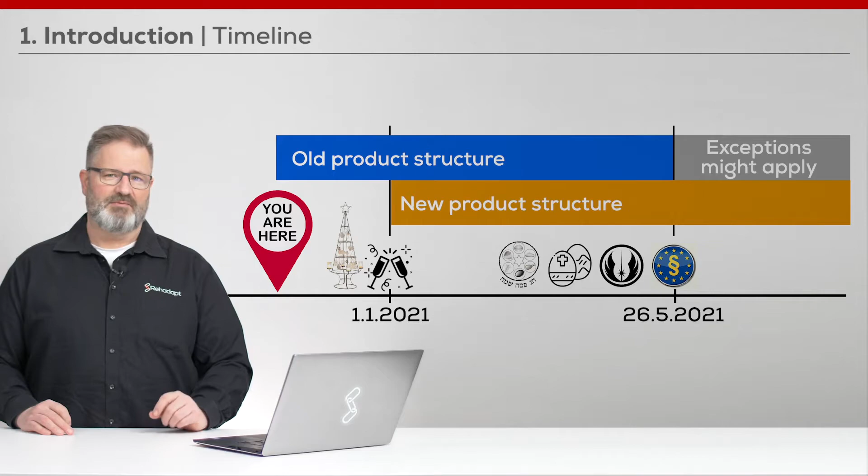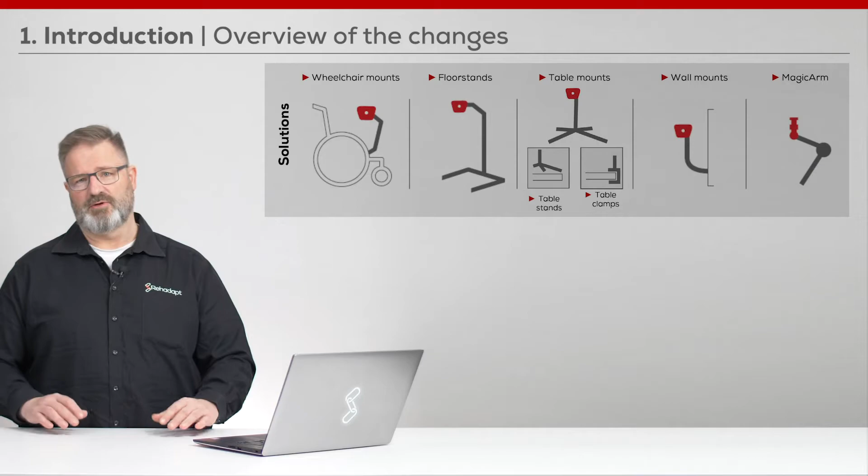Now, what is going to be changed? As you know, our product portfolio consists of wheelchair mounts, floor stands, table mounts, wall mounts, and some infrastructure around the Manfrotto Magic Arm.

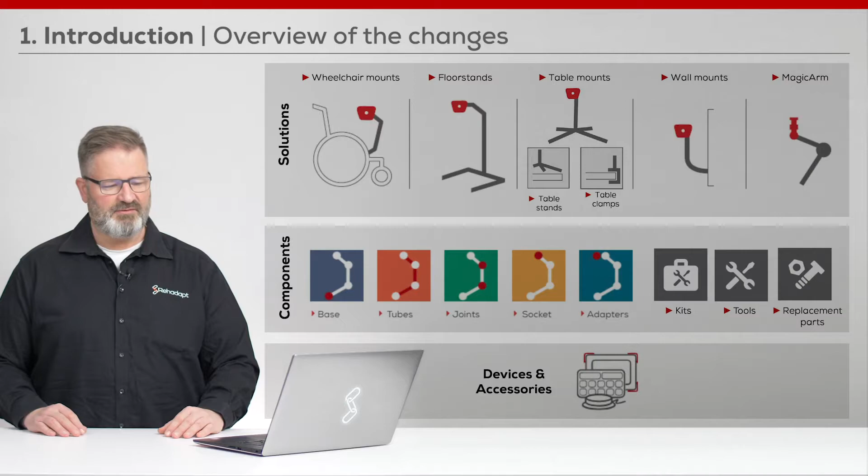Beside these full solutions, we categorize our products in families of components. In these families there are also replacement parts, tools, and complete kits. We also have some device accessories, switches, iPad covers, and so on.

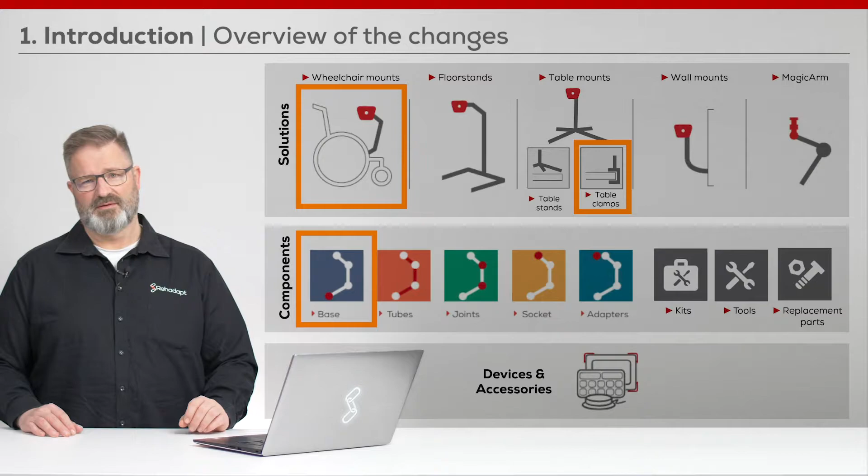Now, in this entire portfolio, the changes are being made around the wheelchair mounts, around the connecting parts where our parts meet the wheelchair, so the frame clamps and the bases, and the clamping parts of the table mounts. All the rest of our portfolio stays quite the same.

Now, particularly, you might wonder if we are keeping up the VMS service. Yes, we do. You'll still be able to hand in customer data and our team will work on a proper solution.

If you look at this process as a black box, nothing will change. You will hand over information, we will hand over a suggestion for a solution. In between, in this black box, we will handle things slightly differently.

The structure of our commercial quote will look a little different, although we're basically still using the same parts. It's declared differently to make sure that we're in line with regulatory demands.

You'll also wonder if we still keep up the effort to train you and your team and your customers. Yes, we will. In fact, we will even increase our efforts, as the standards of the medical devices are higher than before. Also the expectation of the qualification of people handling these products has increased. So we will step up with our training efforts, and you will have more offers from us to receive training on how to work with our products.

We will also continue to sell our kits, like the assessment kit, the service kit, and so on. That part will remain unchanged.

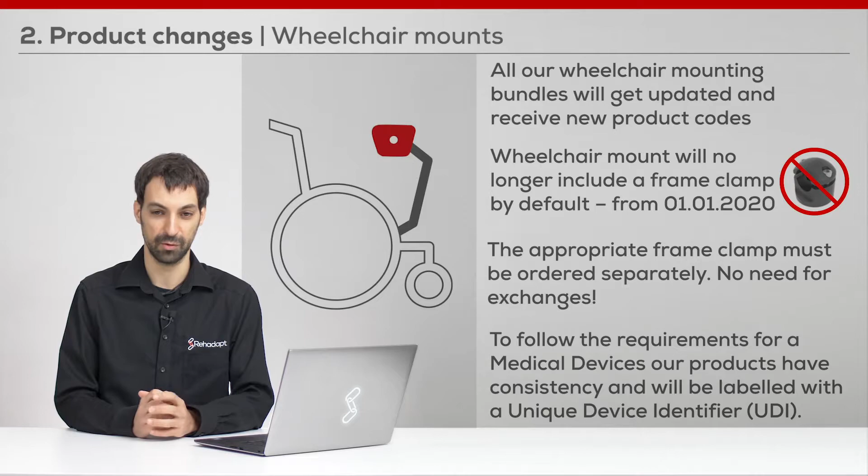We have three product lines in the wheelchair mount category. As you know, we have the M3D for heavier devices up to 6 kilos, the hybrid 3D mounts up to 1.8 kilos, and the light 3D mounts up to 1.2 kilos.

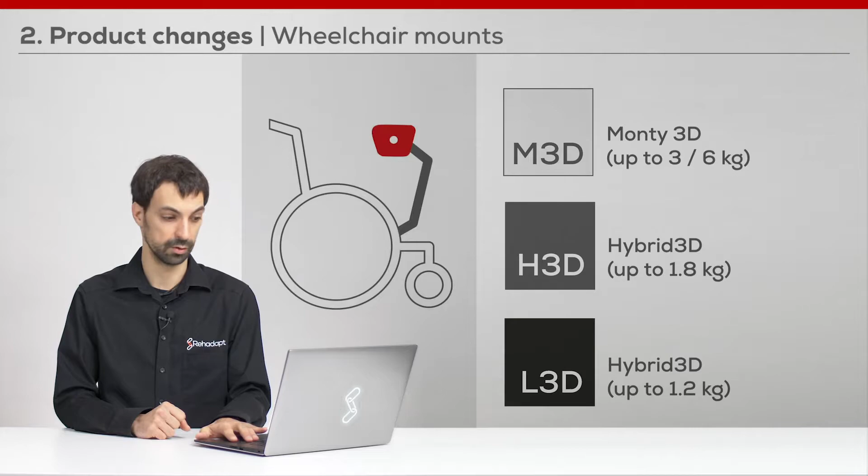All of those wheelchair mounts will be pre-assembled and delivered in a standard package. The package will look like what you can see here on the pictures: standardized cardboard boxes that can be used to be shipped to the end user, but also in warehouse as well as shipping. We also have a packaging concept where you can pick two or three boxes and put them in a bigger box and pack them together to be shipped.

Also, all of this packaging uses eco-friendly materials, so cardboard, which is also good for Mother Earth.

Now I'm going to go into detail over the new Monty 3D mounts. The standard mount is the Monty 3D Quick Shift. It includes quick shift joints on all the joints, as well as a quick shift UDS, and it comes pre-assembled with quick shift joints, but it also includes bolts in case you want to downgrade your quick shift joints to bolted joints. It also includes slip out safeguards in case you want to add them to the horizontal tube as well as the top of the vertical tube.

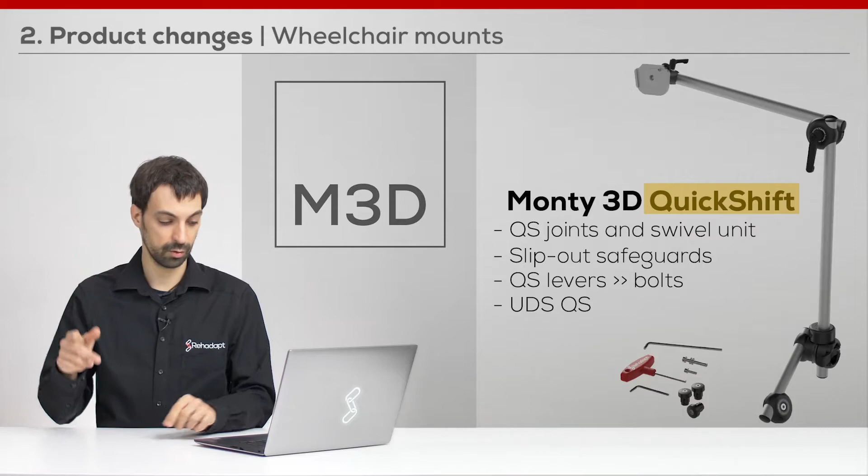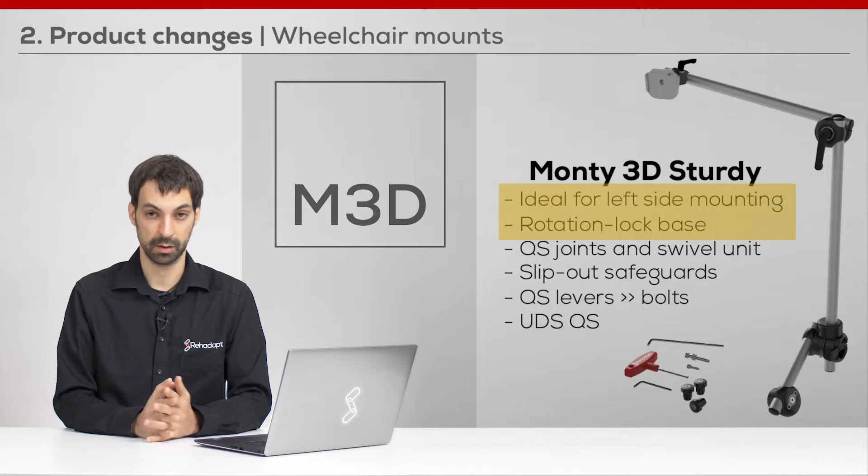Now we also have the Monty 3D Sturdy. This is a completely new mount, which we didn't have a similar one in our catalog before. It is similar to the Monty 3D Quick Shift, but includes a rotation lock base, which makes it ideal in case you want to mount it on the left side of a wheelchair. It also includes bolts for replacing the joints, as well as slip-out safeguards.

Our previous eye control mounts have been replaced with the Monty 3D Pluses. So we have the Monty 3D Plus and the Monty 3D Plus HD. Plus means more flexibility and more adaptability with these mounts because they include an additional tube. You can use that tube for replacing any one of the individual tubes, which means you can either get more reach to the front on the horizontal tube, or more or less vertical length. They both include UDS QS, which make them particularly appropriate in case you want to mount an eye tracker device.

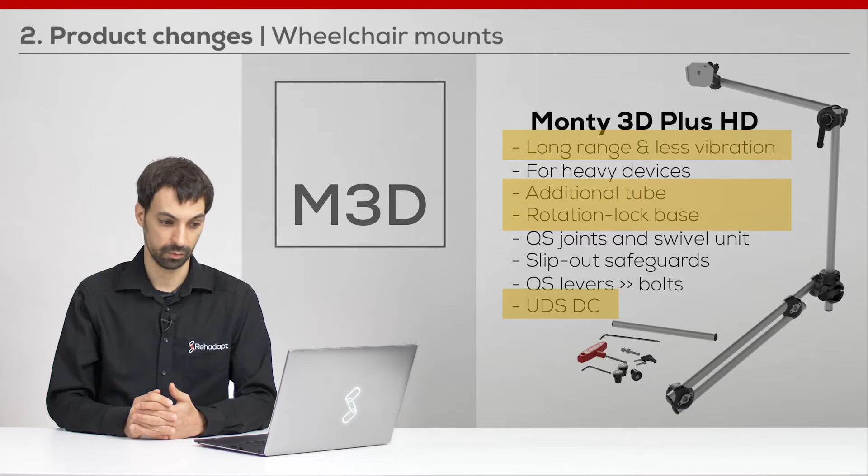Of course, in the case of the Monty 3D Plus HD, you have the double tube, which allows you to get a longer range as well as less vibration.

For the cases where cost is the defining factor when choosing your mount, we continue to have a more approachable mount, the Monty 3D, which only includes bolted joints and a simple swivel unit, and is there in case you want a cheaper option.

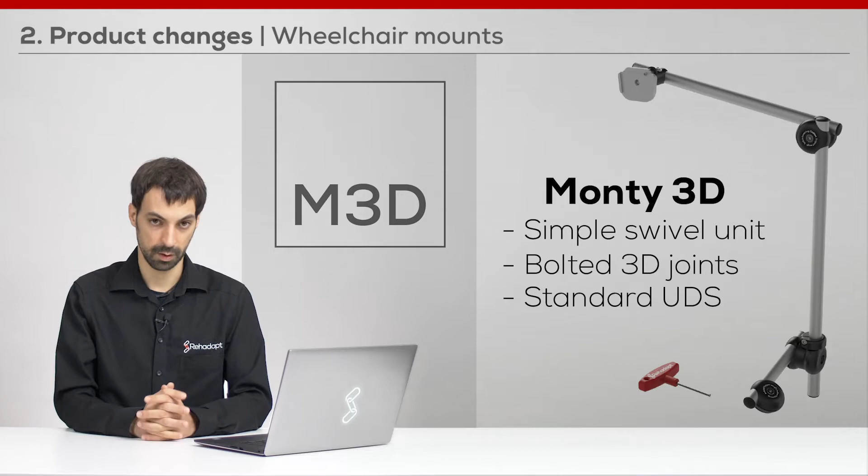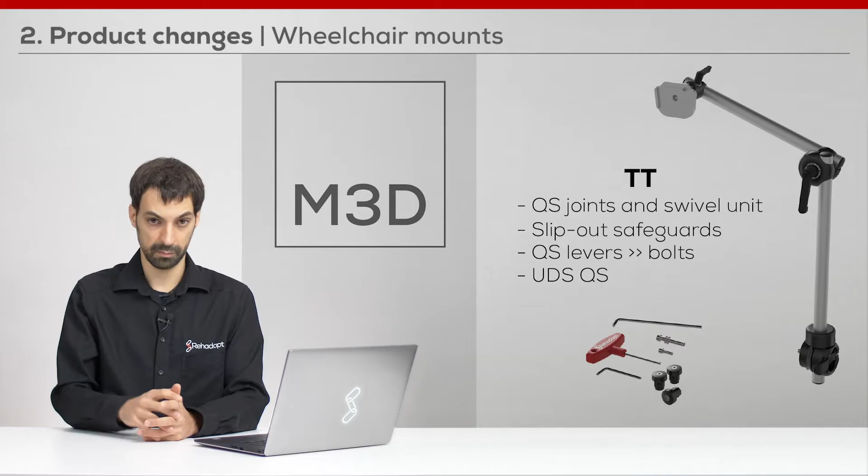We continue to have Monty 3D mounts with two tubes, which we can now call TT for two tube. We have them in two different sizes: the Monty 3D TT, which has quick shift joints and the swivel unit, appropriate for devices that you can use in touch mode and are mounted or secured roughly over your lap.

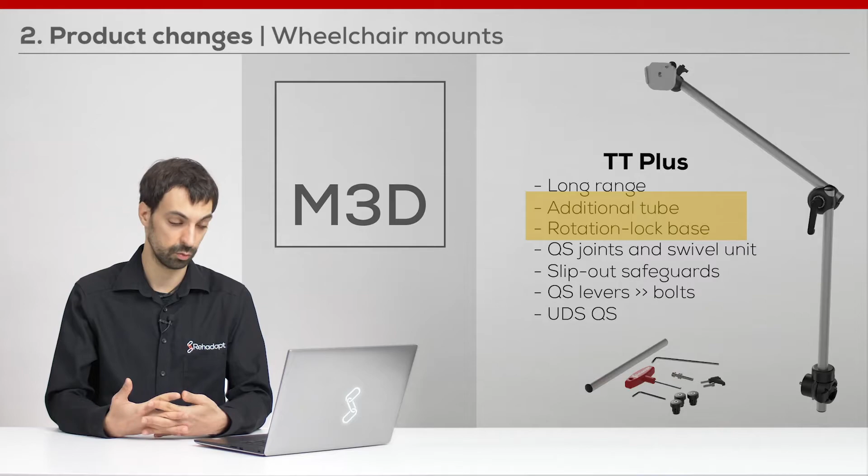And we have the Monty 3D TT Plus, which, as it is a plus mount, includes an additional tube, which you can use, and it also includes a rotation lock base, which also makes it appropriate in case you want to mount a two-tube mount on the left side. They both include a UDS quick shift, and come with bolts in case you want to downgrade the quick shift joints, the quick shift levers, to bolts, and also include slip out safeguards.

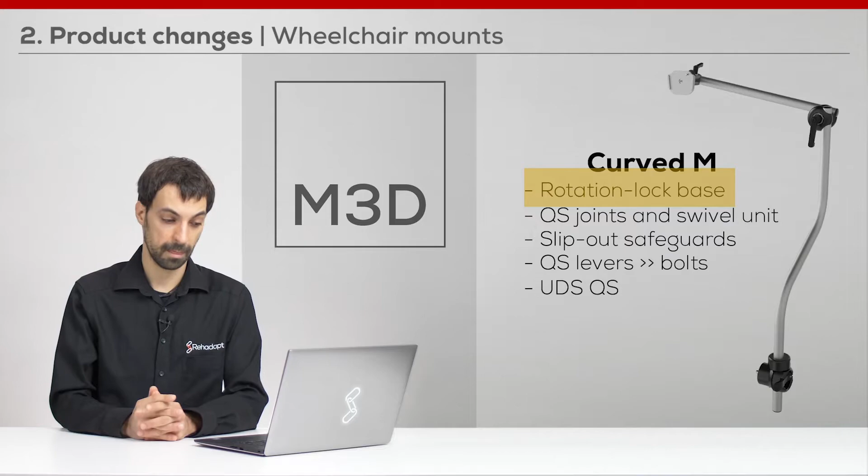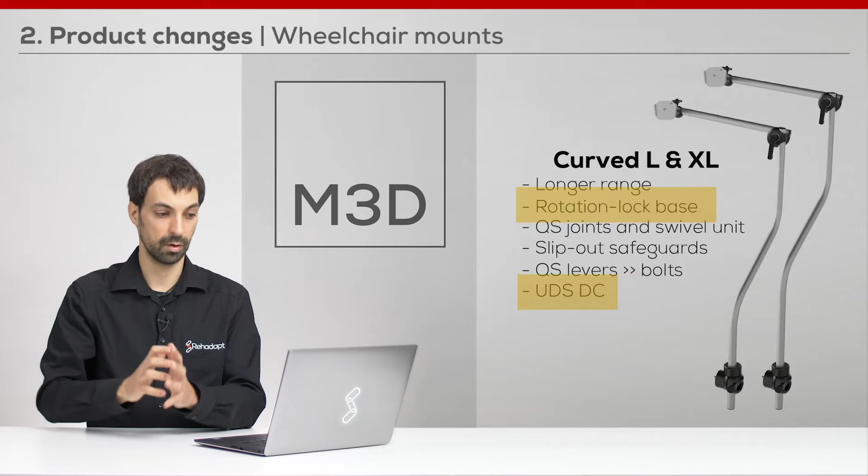We also have the curved mounts in three different sizes, M, L, and XL, which differ mainly in the size of the curved tube. They all include a rotation lock base, but in the case of the L and XL, they come with a UDS DC, which makes them particularly appropriate when you want to mount an eye tracking device, because the UDS DC offers the option of clamping to the horizontal tube with one bolt, and then you can adjust the orientation of the base plate with a lever or a bolt as you want.

Now moving on to the H3D mounts. We have four H3D mounts with both the UDS and the SLS variant, in a short size and a long size, which only differ in the size of the tubes. H3D mounts are usually appropriate for mid-range loads, not only for devices such as a tablet with an external eye tracker, but also in case you have a simple tablet used in touch mode, where there's always an additional force applied on the tablet and consequently on the mount.

All the hybrid 3D mounts come with restraining caps as well as bolts for replacing the quick shift joints with bolted joints. And we have the option of having them with an SLS interface or with the UDS.

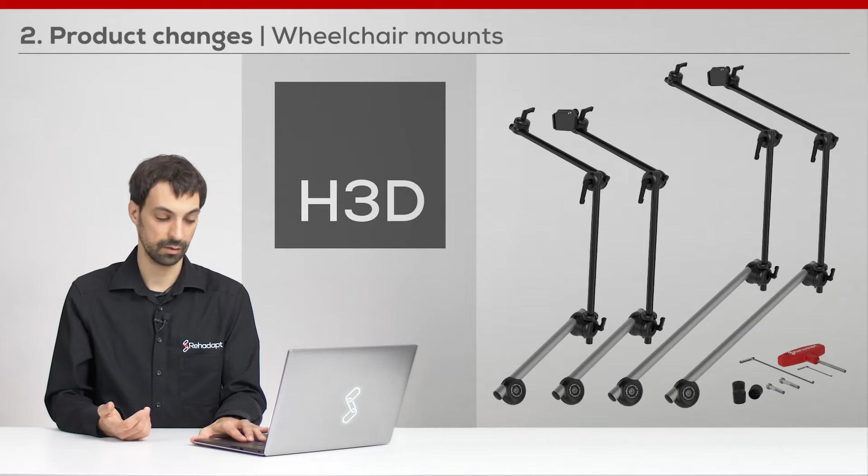Now talking about the light 3D mounts, we have banned, per se, the single tube mounts. Why? Because first of all, our sales numbers were not very good, and because the mounts themselves offer very limited flexibility, as you only have one tube that can only be oriented in one direction around the base.

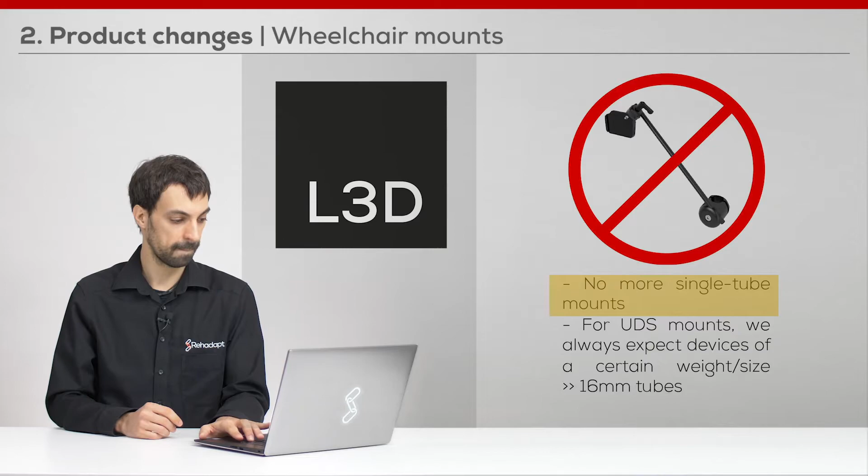We continue to have 10mm tubes, but for the SLS interface only, as you can see here on the Light 3D TT SLS. This one is ideal for small switches or for wheelchair controllers, and does not have a swivel unit, as this small device can easily be swiveled away at the quick shift joint level.

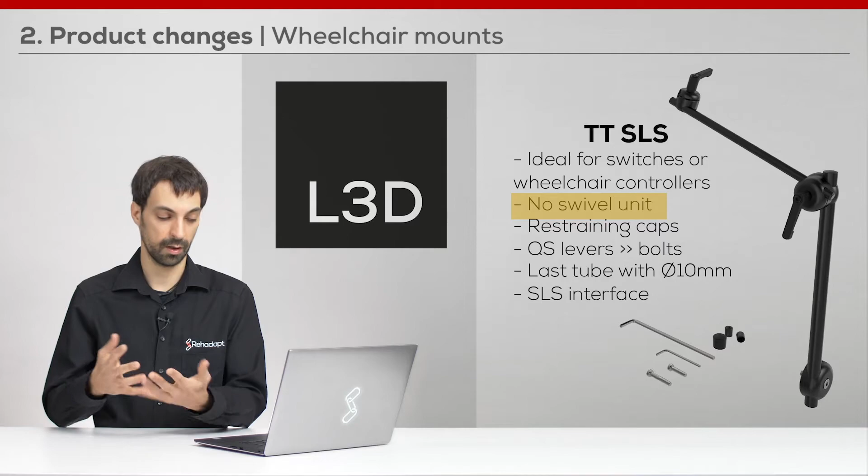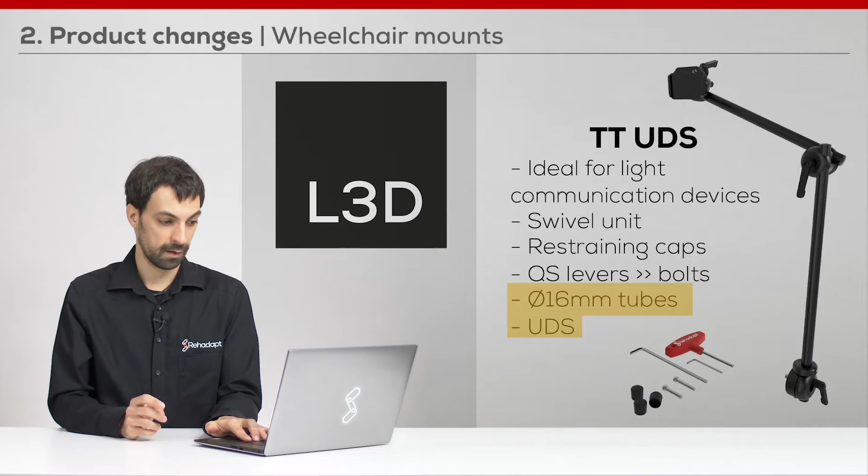We have the L3D TT with the UDS, which, as I mentioned before, has a 16mm tube and the UDS, as well as a swivel unit directly at the base.

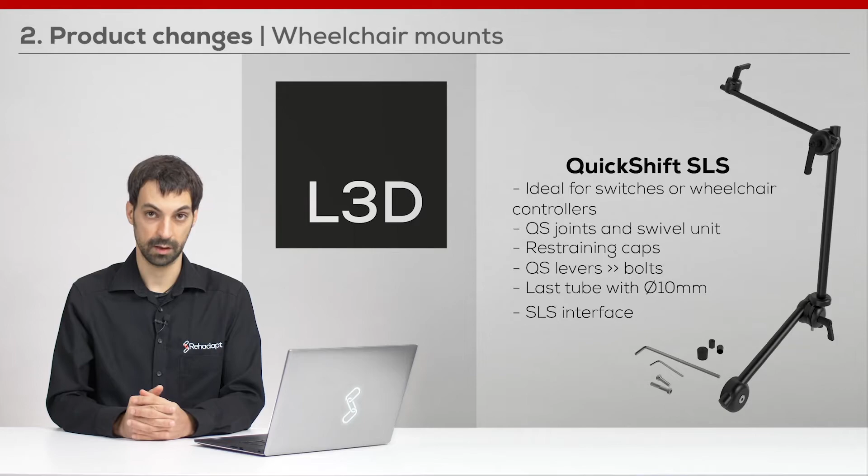We also have a Light 3D Quick Shift SLS and the Light 3D Quick Shift UDS. Both those mounts are 3-tube mounts, and in the case of the UDS, it has a 16mm tube at the end, while in the case of the SLS, it has a 10mm tube at the end. Those mounts, just like the H3D and M3D mounts, come with restraining caps and bolts for downgrading the quick shift joints.

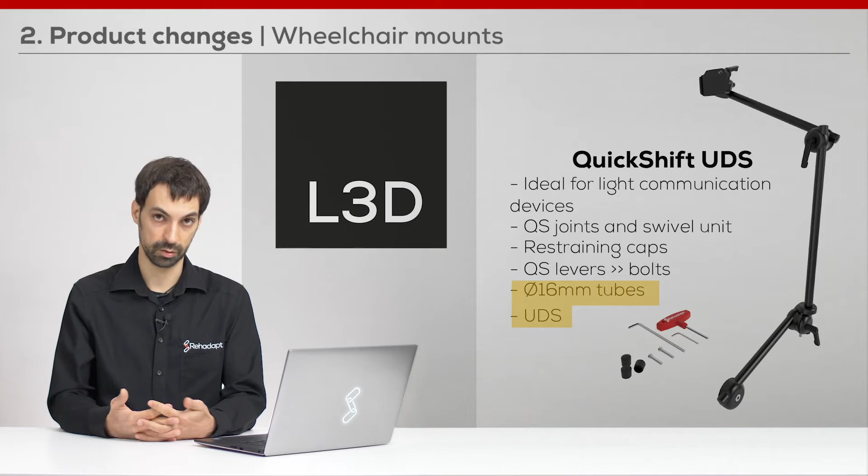Now moving to the Light 3D headrest mounts. In case you want to mount a switch on the left or right side of the user's head, so they can use it either like this or like this, you can use the headrest one switch mount, but remember that you have to order the Light 3D 10 base separately.

Why? Because the Light 3D 10 base comes in two different sizes, so you can use it with a frame clamp, M3D frame clamp, or with a pre-configured L3D 10 base, which is smaller in diameter, as you can see here on the picture.

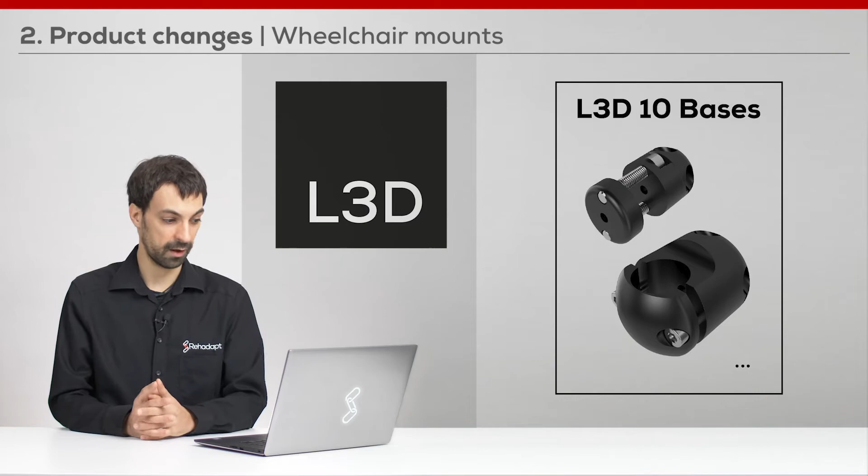The headrest one switch mount comes with restraining caps, as well as cable clips, so you can keep your switch cables organized along the mount, and is also available with the option of having a flex back tube at the end to provide more comfort to the user.

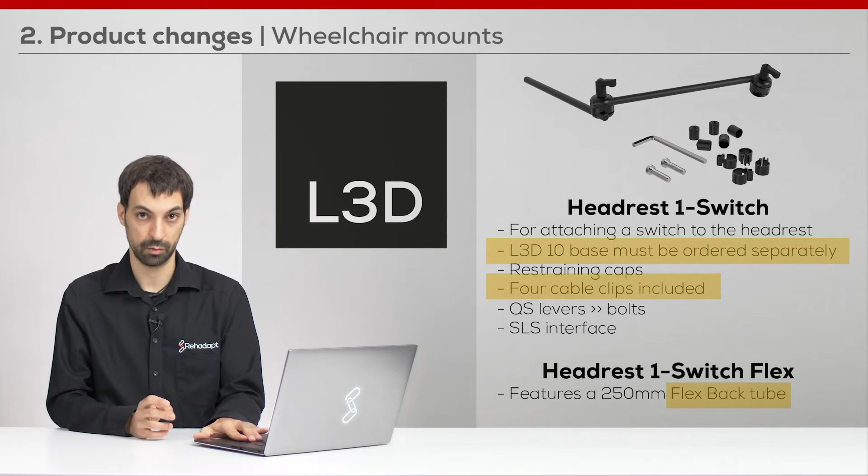We continue to have headrest 2 switch mounts for mounting two switches on the left and right side of the wheelchair. It also comes with cable clips, as well as bolts to downgrade the quick shift joints into bolted joints, and is also available with flex back tubes.

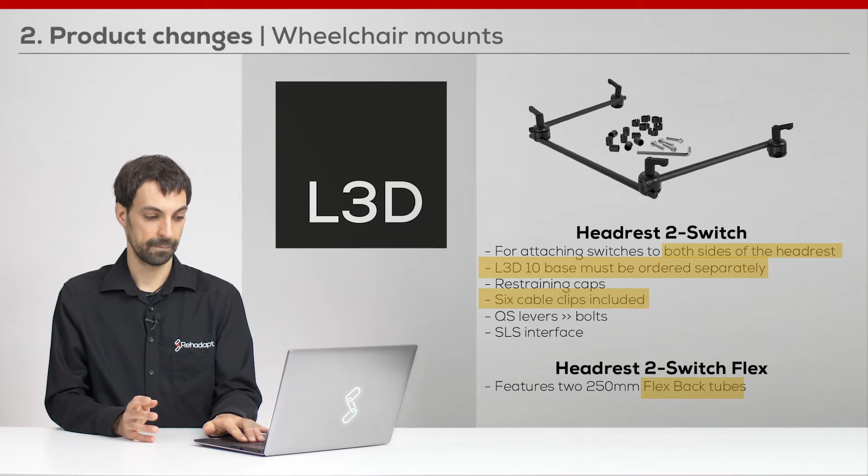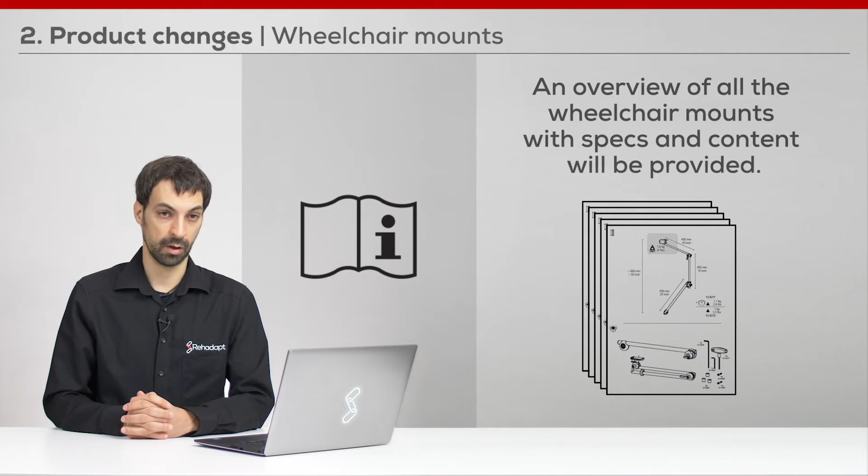I know this is a lot of information that we're just dumping on you at once, but we will provide you with an overview of all the mounts, as well as the technical specs and the content of the box, as a set of spreadsheets like you can see in the picture here. That will be available for download on the link below. All of this information will also be available on our website, as well as on the instructions of each mount.

Now moving to the frame clamps. As you know, we have lots of frame clamps in our catalog, which allow you to clamp on round tubes with sleeves, on T-nuts, on oval tubes, square tubes, etc.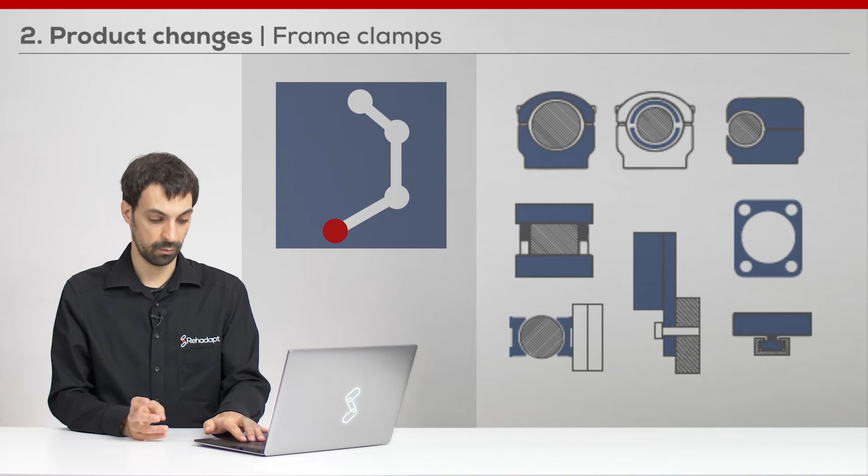Now, to ease everybody's life, not only yours but ours as well, we have decided to introduce a flat rate, so now all of the mounts have the same price. If you want to know more about it, please contact our distribution partner. The flat rate was calculated as the exact average of our previous sales over the last 6 months.

The frame clamps have their own intended use and will be listed as medical devices, such as the wheelchair mounts, which means when you buy a wheelchair mount, you will be purchasing 2 medical devices. First, the frame clamp, which has its own intended purpose and comes with its own unique device identifier, and secondly, the wheelchair mount itself.

As you know, we also have accessories for frame clamps, such as the sleeves, which are usually purchased separately. But in order to stay consistent with the flat rate idea, we have introduced new frame clamps in which you have the sleeves and the corresponding frame clamp together as a package. This is valid not only for the round sleeves for diameters smaller than 25 millimeters, for example down to 22 millimeters, but also for oval tubes.

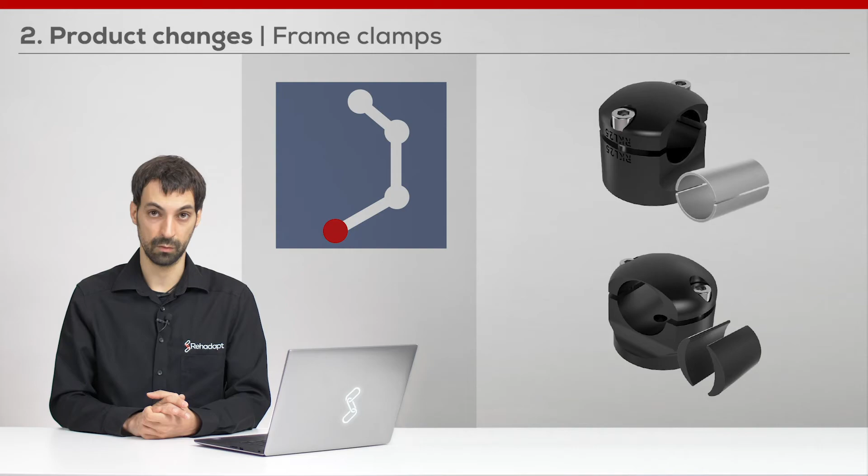Now moving on to the table clamps. In the table clamps category, we have discontinued all of the previous L3D table clamps because we had a huge variety of L3D table clamps with UDS, with SLS interface, with bolts, with quick shift joints. Now we replace all of those variants with only 6 mounts, as you can see here.

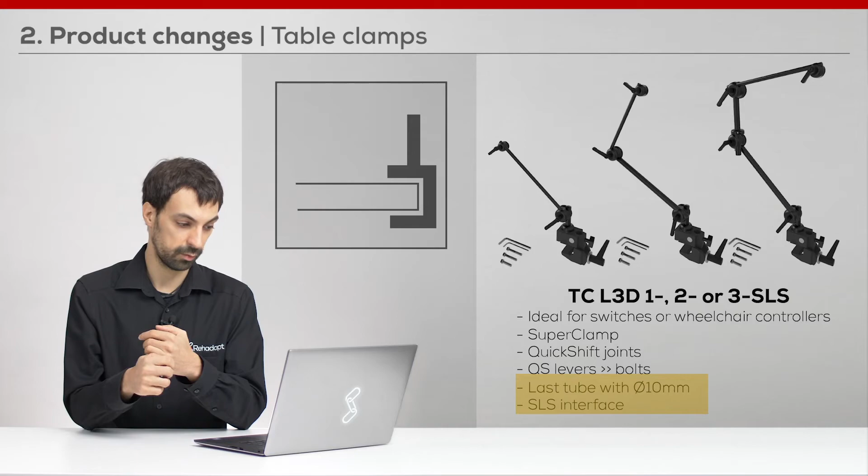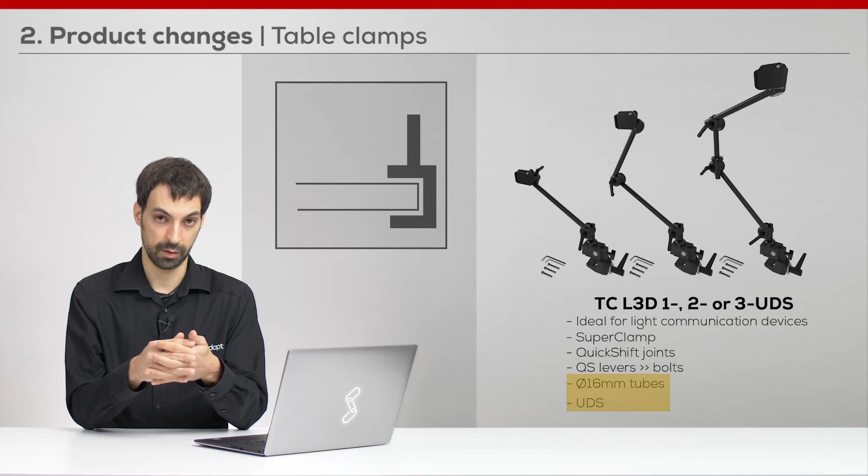So we have 3 mounts with the SLS interface and 3 with the UDS. They differ on the number of tubes. So you have the table clamp L3D 1, 2, or 3 with 1, 2, or 3 tubes, and the same for the UDS. We follow the same principle that we introduced for the L3D wheelchair mounts, in which the SLS mounts always come with a 10 millimeter tube at the end, and the UDS mounts always with a 16 millimeter tube at the end.

All of those mounts come with quick shift joints, but also include the bolts in case you want to downgrade the quick shift joints into bolted joints.

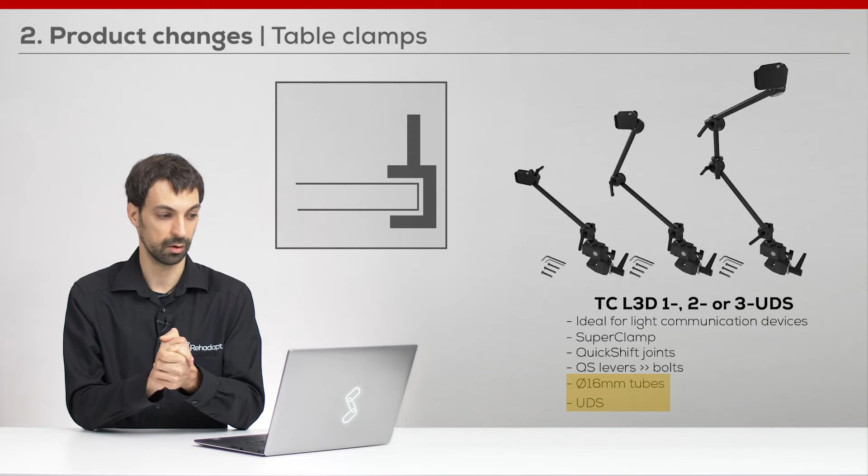In case all of this information is a little bit too much for you, or you want a summary of all the new versus old products, you'll find a link with information about all the products that we will discontinue and also all the new products. So in case in the future you're looking for a Monty 3D S solution, you can check there which is the new bundle that will replace it as an existing mounting solution. You'll also find more information there about regulatory compliance and about the things that we will change in the future.

So much for the new products. I'm sure Philip has given you a very good overview about the changes to the existing products. But also, with all of your feedback that we have received over the last years, we have created a lot of new products that will make your life easier.

As Uli told you previously, we also provide a wide range of accessories that allow you to use the Manfrotto arm in combination with switches. We found out that it would be beneficial for you to install your Manfrotto arm even safer to your wheelchair. That was the reason to design a special base system that is now able to be combined with all Rehadapt frame clamp systems, allowing you to install the Manfrotto arm safely and stably to your wheelchair.